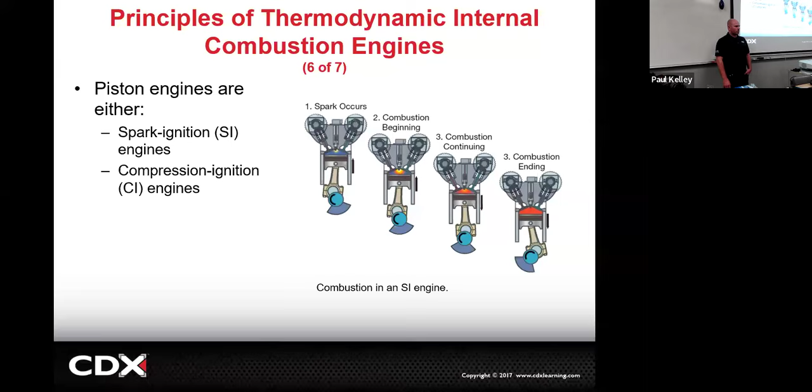Makes sense? And then the flame starts to come down, it builds pressure, and it pushes the piston down. So that's the only stroke that we really benefit from on a 4-stroke spark ignition, or really any 4-stroke engine, right? Now, yes, we have to do some of these next steps - the intake, the compression, the power, and the exhaust. We have to do these 3, but the only one we really benefit from is the power stroke.

Well, here's why, I'll explain to you. On the intake stroke, is that piston giving us any power? No. On the compression stroke, is it giving us any power? No, in fact it's taking a lot of power because we're having to push it up. So we're like, man, this sucks, we have to do a lot of work. And then a beautiful thing happens, people.

A beautiful thing - we give it a little bit of spark, and because there's already fuel in there, it initiates combustion, right? Yeah, that's on the back of some bumper stickers and some t-shirts, so we'll come back to that. It starts this combustion, and as that air and fuel are burning, it's expanding, it's building pressure. So as it builds pressure, what's it going to do to the piston? Push it down. Right there, we can harness that power and put it into the crankshaft and have the crankshaft turn a transmission, have the transmission turn the drive shaft, have the drive shaft turn the wheels.

We're getting power right there. Then, unfortunately, when the piston comes back up, that gas, that air and gasoline is now spent, so it's inert - it means you can't burn it again. We have to exhaust it. Make sense? So you do the intake, the compression, and the exhaust, all are necessary just so we can get the power. Make sense? Power is the only one that actually gives us any zoom zoom, that's where the vroom vroom come from.

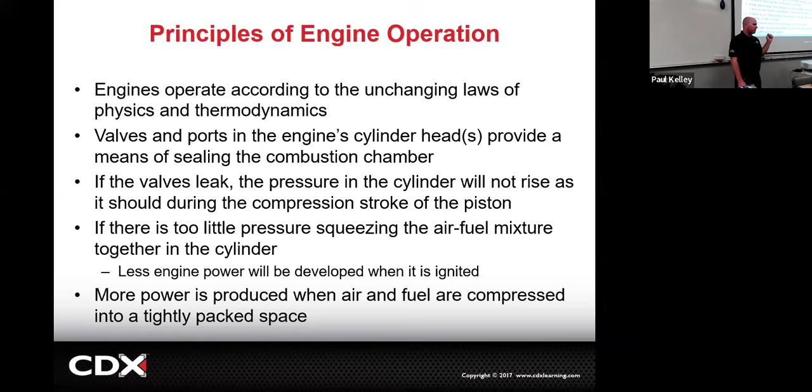All right, cool. Then, of course, if the valves leak, like it's saying, the pressure in the cylinder will not rise as it should during the compression stroke of the piston. If there's too little pressure squeezing the air fuel together in the cylinder, there's going to be either less engine power or maybe even no combustion at all. That's a full-on misfire. Make sense? So the sealing of these valves and the piston and the cylinder and all that stuff is really important when it comes to making that power stroke, especially when we're looking at how much compression it makes, okay?

So that's the main deal. And then pressure and temperature we talked about, Charles's Law: the more pressure you have, the higher temperature you have. So one of the things we need to do to start that ignition process, the combustion process, is we need to raise the temperature. How do we raise the temperature with the compression stroke?

We raise the compression, right? We squeeze it from 10 parts down to 1 part. And if we successfully squeeze it from 10 parts down to 1 part, it's hot. All those molecules are agitated and they're like, get off me, you know, and what's it going to take until it all breaks loose? It's one little spark, boom, and everything's ready.

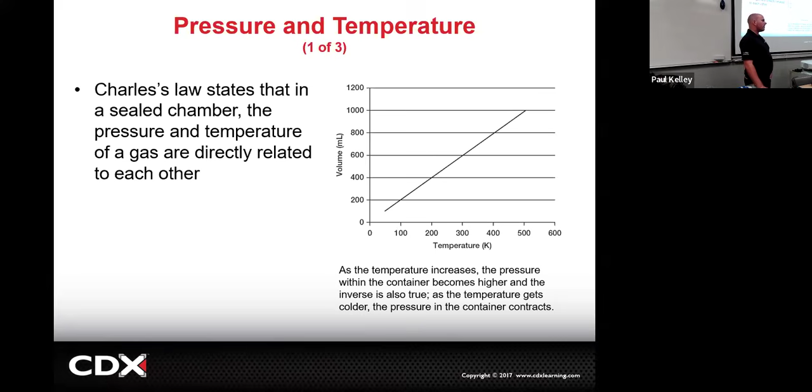But if you have no compression and you just spray a little fuel in there and give it some spark, it's not really under a lot of compression, you could spark it, but it's not going to make any combustion. Make sense? You need a lot of compression. You need the compression that it calls for in the service manual, as a matter of fact. That's why we check that.

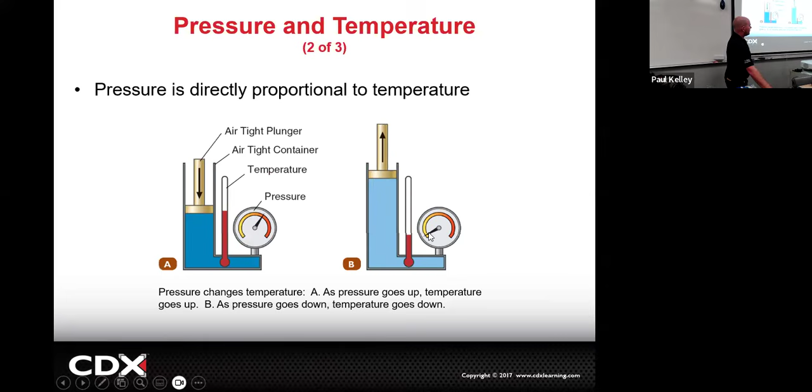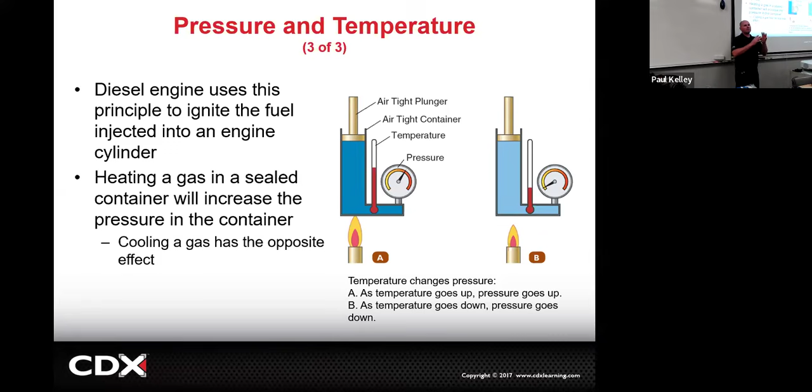Cool. And then this is just kind of illustrating the same type of thing. If we push down on this, increase the pressure, it's going to increase the temperature. If we pull up on this, it's going to decrease the pressure and decrease the temperature. If we heat it, it's going to increase the temperature and increase the pressure. And if we cool it, it's going to decrease the temperature and decrease the pressure, right? There's a lot of ways to explain the same thing. If your temperature's up, your pressure's up. If your pressure's up, your temperature's up, right? They go together. They have this relationship.

All right, so overall, that's kind of what we're trying to get at. And when we look into some more of the engineering aspects, the temperature of the gas is one measure of how much energy it has. Heating of a gas makes the particles move faster. So we're going to heat it, and that's going to make them move a little bit faster, and that's going to make them even more prone to that combustion process, like I was kind of saying.

Cool. How do we do it? We raise it first by doing compression of the air and fuel mixture, right? And the more compression we give it, this was kind of interesting: the more energy the air-fuel mixture has, the more force it exerts on the piston and the more work it can do. When we run the higher compression, everything's squeezed a lot tighter, more volatile, more ready to start that combustion process. And it's going to be more likely that we're going to have a thorough and complete combustion.

Make sense? If you're running an 8-to-1 compression, that's enough to fire the cylinder, but there might be a little bit of fuel left over. It might not really start the combustion process exactly when you were hoping, right? So by increasing that from 8-to-1 all the way to like 10-to-1, 10.5-to-1 - anybody know what a performance engine makes? What do we got on the GR Corolla? It's up there. I don't think... maybe it sounds a little high, but as you start to get over those 10-to-1s, 10.5, 11-to-1, 12-to-1 maybe, that's a very efficient and very powerful compression ratio.

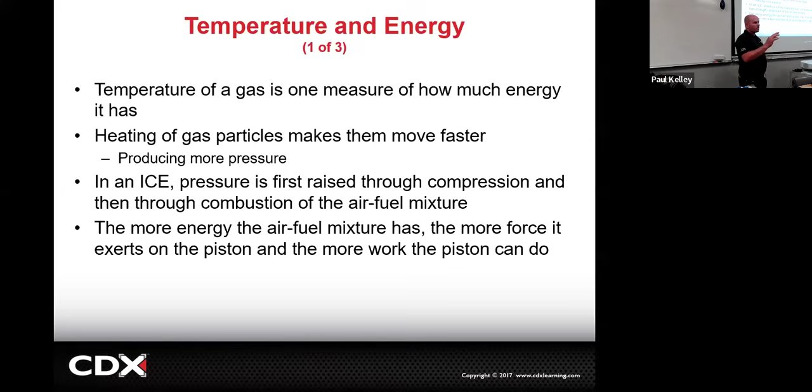Bang, spark it, and then that fuel is going to expand, and that's going to start to push back down. Cool, so that's what we're trying to do.

Now if we look at this, gasoline has a certain BTU per gallon, so there's a certain amount of power that can be extracted from gasoline. If you had everything dialed in perfect, very efficient, spraying 100 drops of fuel and 100 drops are being burned, you can get 14,000 British thermal units as a maximum from gasoline. Make sense? Who thinks diesels make more power than gas?

I mean, kind of in general. So we could say horsepower or torque, and we'll get into horsepower versus torque.

I'll help clarify it, but as fuel for fuel, look at this. Diesel has 25,000 BTUs per gallon, gasoline only has 14,000. And that's kind of the thing. So if you accept the fact that diesel has more energy in it, there's higher potential for power out of diesel. There just is. Comes with a cost though. There's a lot of challenges with that.

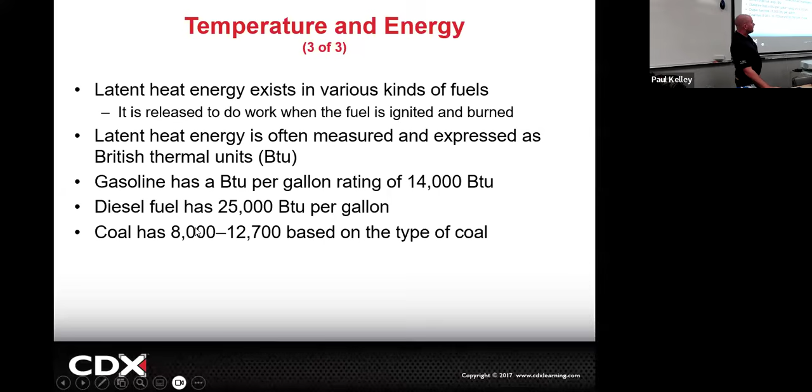And my Tesla's in the parking lot charging. I'm gonna get a green sticker, like Mother Earth, but I'm literally charging it with coal. Actually, what time is it? Solar's probably cranking right now, but when the sun starts to go down, the coal picks up. The sun goes down, the coal comes up. So right now it's charging on solar, so I could put the green sticker on there, but in a few hours I should probably take that bumper sticker off. At least most of you guys are burning gas, and I'm gonna be burning essentially coal through electricity. Just calling it how it is. I don't feel bad though.

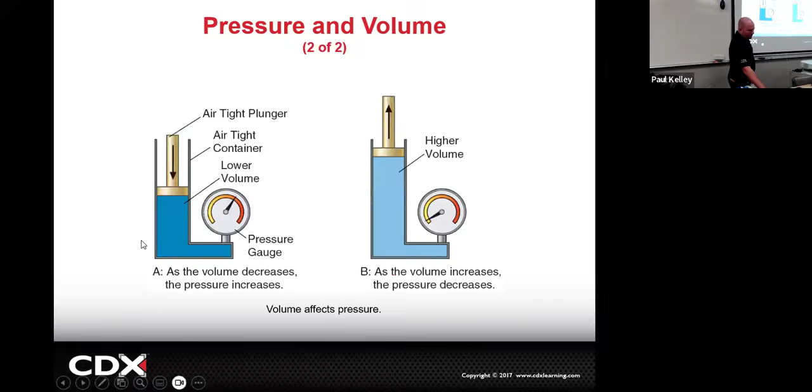All right, so I think we're probably pretty solid on that. Let me skip a couple things. Let's talk about force, work, and power.

Let's see, who's it going to be? Oh, this is definitely going to be Rudy. Rudy right here, how much is it going to take to pick this up? Well, 150 pounds. For you to move that, you have to generate 150 pounds of force. Would we agree? So that's just force, the effort to produce a push or pull action. So you're going to try, you need to generate 150 pounds to move this, right?

But the question is, how far are you going to move it? Well, in this case, 150 pounds of force is all you need. But if you need to move this weight 4 feet to get it right here, that's no longer force. Make sense? Force doesn't have a distance associated with it. That's a measure really of work, right? So it's kind of interesting.

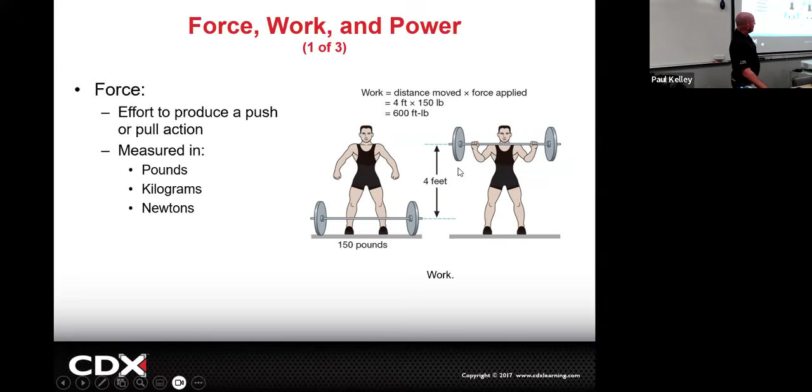If you look at the two, work is when a force causes movement, work is done. So look at it like this. That 150 pounds I'm making, that's about 150 pounds right there, maybe 200, are we kidding? All right, so did I do any work? No, I didn't move anything, right? So I generated a force, but I did no work.

A force is cool, but it doesn't really accomplish anything. That's part of the reason we don't worry too much about how much force an engine makes, because it's not necessarily usable. We need to add a distance in there.

If you look at work, when force causes movement, work is done. So technically, did I just do work? Yeah, I didn't generate a lot of force, but I moved something. I performed some work. Make sense?

Sometimes when people are moping and say, oh, I worked really hard, I look and say, yeah, but you didn't get anything done. So actually, it just means you tried hard, but you didn't do any work. Work is physically moving something, okay?

It's equal to distance moved times force applied. So if you did 150 pounds on that barbell, but you picked it up 1 foot, it'd be like distance times force, 1 foot times 150 pounds. And that would be an amount of work. Make sense? Pretty interesting.

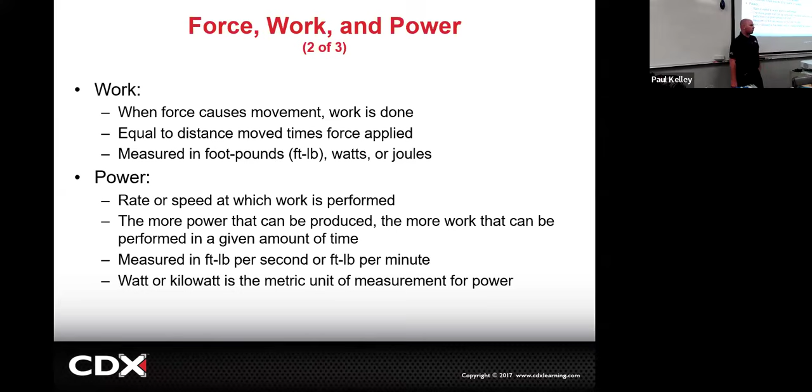Do you know what horsepower is? They figured out how much power a horse had, how much work a horse could do in a certain amount of time. So you take a horse and say, hey, how many buckets of water can you haul out of this well in 60 seconds? And the horse does 10 buckets in 60 seconds.

That's 1 horsepower. Then you got this Briggs and Stratton, and it's 5 horsepower. How many buckets of water should that be able to do in 1 minute? The horse did 10 with 1 horsepower. How many buckets should the Briggs and Stratton do? It's a 5 horse, and the horse did 10.

1 horsepower, because it was a horse, did 10 buckets. A 5 horsepower Briggs should do 5 times that amount, which is 50 buckets. And by the way, the well is 100 feet deep, in 60 seconds. So you have everything there: it moved a certain amount of weight, a certain amount of distance, in a certain amount of time.

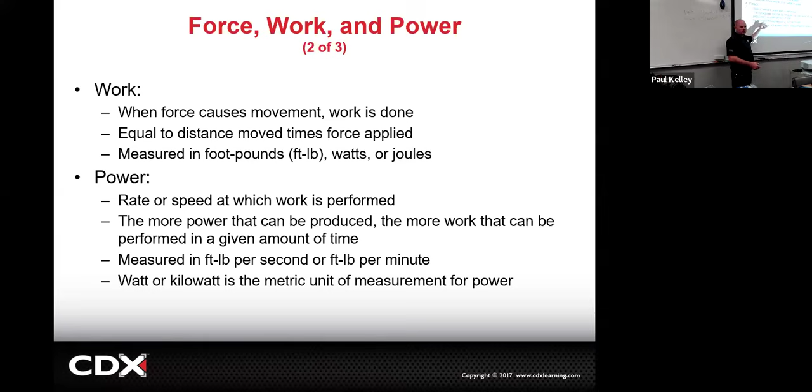That's why we use power, horsepower. Make sense? No, you hate it. Fine, we're moving on. We're definitely moving on.

Cool. So breaking it down, torque is twisting force; movement doesn't have to occur. It's applied before or during movement, so that's where it gets a little weird. If you go to tighten a lug nut and your torque wrench clicks at 100, you did apply force, you just didn't necessarily have movement. It's still kind of like torque, you just didn't really do any work.

So there's your torque. Rotational force applied to the crankshaft of an engine is called torque. Unit of measurement: foot-pounds. Now the formula for horsepower, this is where it gets weird. Horsepower equals RPMs times torque, divided by 5,252. I don't totally know who came up with that number, but that's how we convert it into what a horse could do.

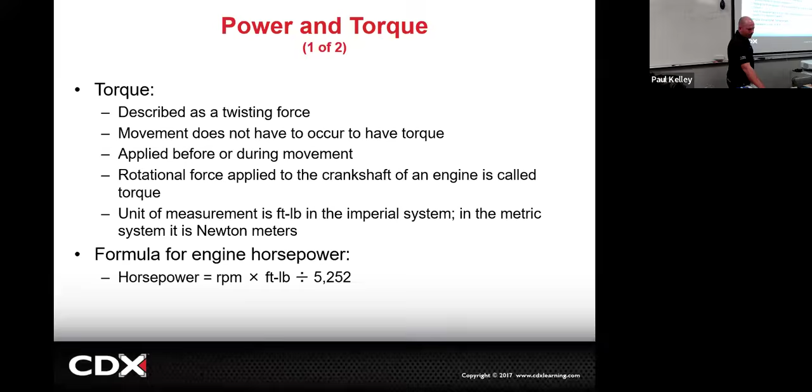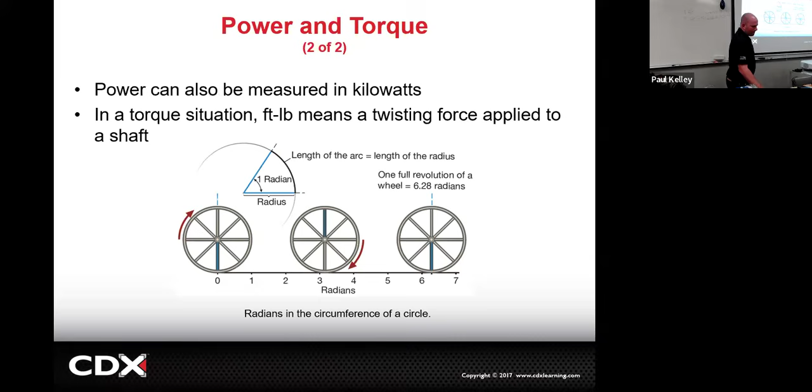So a lot of times horsepower is calculated. You can of course measure it on a dyno. A lot of times dynos have their own electromagnetic way to load the engine, or sometimes use water, and we measure how much work it does in a certain amount of time. That's how we measure horsepower. Or you can measure it in kilowatts, which is more normal for electric motors. In fact, sometimes they do measure electric motors in horsepower, they'll say that's a 3 horsepower electric motor, that's a big electric motor. But most of the time they're going to measure it in kilowatts. All right, so overall, I think you get it.

Now, when we start talking about the load factor or the power range, this comes into how the engine is designed, how it's made to work. If you want an engine that can run all day, every day, at 50% of its redline and just do work for 8 hours, honestly, a typical gasoline engine is not going to be real happy with that.

They'd usually go over to a diesel and build a diesel to be able to do that. So if you went on a construction site, you see somebody moving dirt all day. They work 8 hours a day, that's their whole shift. They just move dirt all day. They're going to design an engine to be able to do that all day long, every single day. Make sense? You think that's what our cars are designed to do?

Your average car, you think somebody jumps in there and just moves dirt with their car? What do you think they're doing with their car? They move their butt from their house, from their couch, to their job a half an hour away. And then it sits in the parking lot. Then they get in, they do it again. And guess what they're going to do tomorrow? They do it again, right? So our cars are designed mostly for that.

If you wanted something that was going to move dirt for 8 hours a day, plus sometimes these things are multiple shifts. Like locomotives, for example, when I worked on those, a locomotive would get started, sit there and idle, we'd do the checks. It would run from here to Texas, sometime 24 to 36 hours from now.

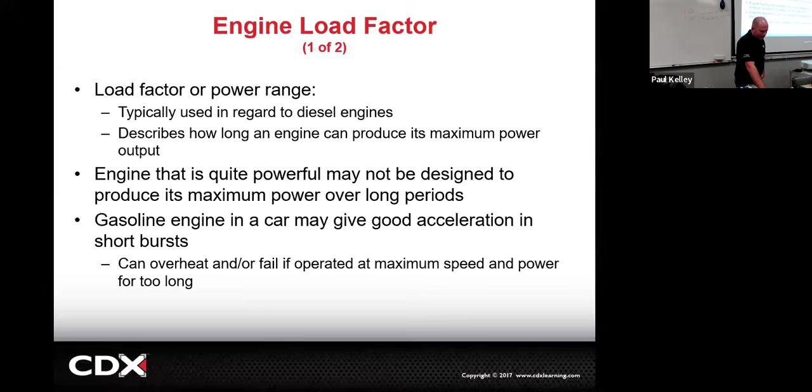In a way, yeah, it's what it's designed for. The longer and harder you run something, heat just builds up, and the more heat builds up, you start to have some parts get hotter than other parts, and now you have things that are not shaped exactly how they were supposed to be shaped. So you got to manage all that heat, it's much harder to do. Diesels, though, are better at that.

If you want something that's going to idle for a long time, be honest with you, a lot of police cars would do better as diesels. Because they're just leaving them running a lot. They got to be hot, ready to do a high-speed chase. Diesels would probably be better for them, in my opinion. Go ahead.

Yeah, that's what they're made for. Typically when you look at a newer modern car, it has a big electric cooling fan, so we're not relying on higher RPM. You've got a lot of various sensors that are looking at the parts. Any modern car is made for road trips too. It's just not really made for stop and go traffic, like a taxi cab. A taxi cab is going to be hard use for an engine, pretty hard use. But for a road trip, it could easily handle that.

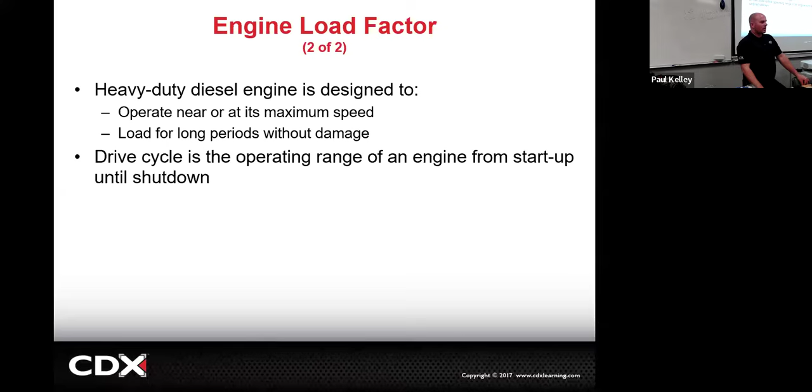However, I wouldn't say they're designed to do a road trip, then leave it idling, then drive all the way back and be idling 16 plus hours a day, every day. It's probably not going to hold up all that well. But at highway speeds, it's a little easier on them. The stop and go is what's tough, for sure.

All right, pretty good. So then we get into, remember, horsepower is twisting force. Torque is twisting force, horsepower is the rate. So there's your dyno. Then when we get into the factors that affect an engine's torque output, it has to do with volumetric efficiency. That's a big term you guys are going to see.

Volumetric efficiency, picture it like this. When we talked about that intake stroke, the intake valve opens, the piston comes down, it pulls the air in, but the valve has to close kind of quick because the compression stroke is coming up. So you get a certain amount of time: intake valve opens, pulls it down, intake valve has to close. Was that enough time to thoroughly fill the cylinder? If you could completely fill the cylinder with air, that would be 100% volumetric efficiency.

Try doing that at 8,000 RPMs. At 8,000 RPMs, that valve is open for such a short period of time, you're probably not getting all the air molecules all the way down into that cylinder to 100%. Does that make sense? So your torque is actually going to fall off. You're going to make your most torque when you're having really good volumetric efficiency. When you get close to redline, high RPM, your torque number a lot of times will fall off, even though your horsepower number might keep going up because you're still doing more RPM, more revolutions per minute. Kind of interesting.

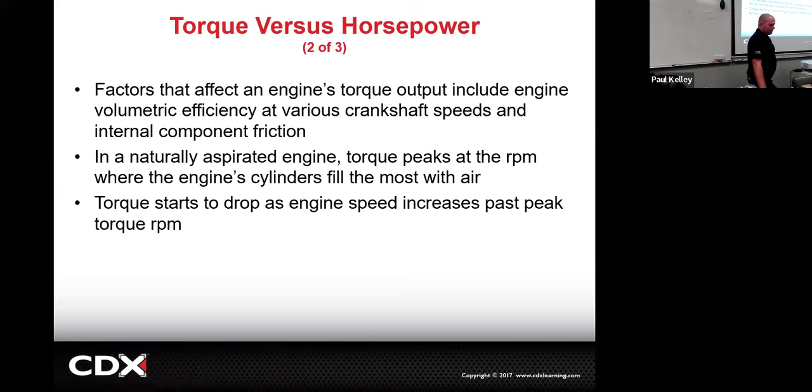Well, for one thing, it's kind of hard to have all the airflow in when there's a little bit of exhaust gases left over in the cylinder. So this is a good way to get those exhaust gases flowing a little faster. Or let's just say, do you guys remember what actually causes the pistons—the valves—to open and close?

So here we got a cam lobe right here. What if you were to open up the valve further and that allowed a bigger opening? Do you think more air could come in? Oh yeah, so maybe we should put a bigger, fatter cam lobe on there, a high lift performance cam lobe, like that, a little chop, right? So sometimes changing the camshaft can improve your volumetric efficiency.

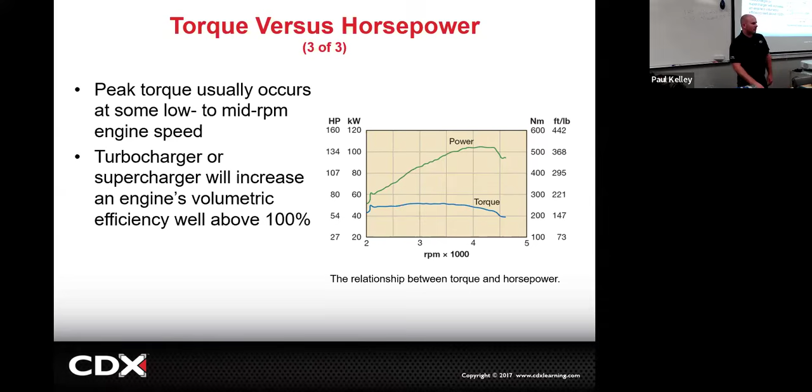And then Toyota's going to use VVTi, and everybody's using their own version, BMW uses Vanos, you know, they got to be special. Nissan's going to use VVEL or something. They all have different names, different technologies.

Generally, horsepower and oil are unrelated. So despite the forums, everybody wants to use the one with the shiniest bottle and stuff. You're not gaining horsepower. If you're honestly gaining horsepower because you changed your oil to a different one, there was something severely wrong with the first oil if it was adding that much friction. Oil should help the lubrication, help the heat, help minimize any wear, but free up horsepower? Nah, I don't think so. Unless it was sludge going through there, which is scary, and I have seen it.

Now let's break down a little bit of those other terms. TDC and BDC. Everybody got TDC? Top dead center, that's as high as it goes. Top dead center is the highest point of that piston. So a lot of times when you go to time stuff, you might need to set top dead center. How would you find top dead center?

Sometimes there's marks on the timing components. For example, I've got a little sprocket here, there's a little dot on that. You guys can see that dot? How about the light, look at that little dot. Oh yeah, right there, I got it on bottom. How about if I went to top? You can see it's right about at the top now. So there's timing marks, yes.

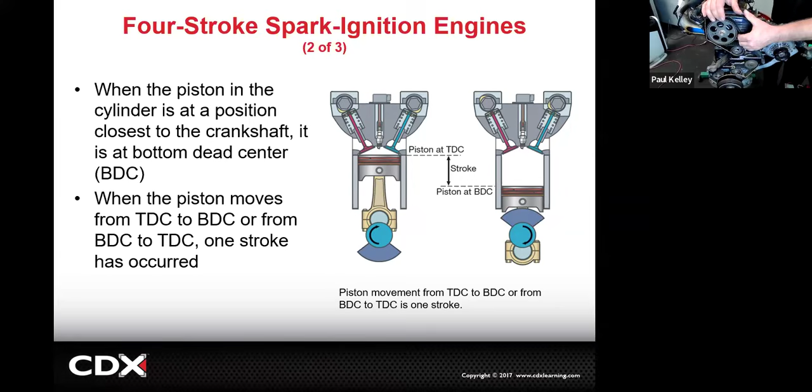Once in a great while, if the timing belt's really worn and the tensioner's really sloppy, you'll go to back it up and sometimes it can jump a tooth. This actually happened to me once, but I was working on all kinds of stuff. Most people will never experience it. However, when it happens to you once, you're like, don't ever turn it backwards, it'll jump it. I turn them backwards all the time, but this one I had was doing that. It actually had a problem with the tensioner, the tensioner was flat and it was enough to keep it kind of tight and forward. But when you went to back it up, all of a sudden one of these teeth jumped the cam, and I ended up a tooth off because I turned it backwards. We're good, but normally that's not going to be what we see. That'd be very exceptional.

What's BDC then? From bottom dead center to top dead center, there's a measurement right there, and you know what it is? It's called your stroke. So if I were to go piston, bottom dead center, make a mark, and then go all the way to top dead center, make a mark, that distance right there is called your stroke. If it's 3.5 inches, that would be like a small block Chevy.

Sometimes what they'll do is, I'm gonna take my small block Chevy and do a stroker kit, go from a 350 to a 383, and they'll take the stroke from 3.5 to like a 4-inch stroke. How they do that is they have a bigger offset on the crankshaft journal, and then they use a shorter rod, so you can vary the stroke. If you think about this, the further your stroke goes down, it's still got to go back up to TDC, right up to the edge of the head. But if you pull this down further, why is that a benefit?

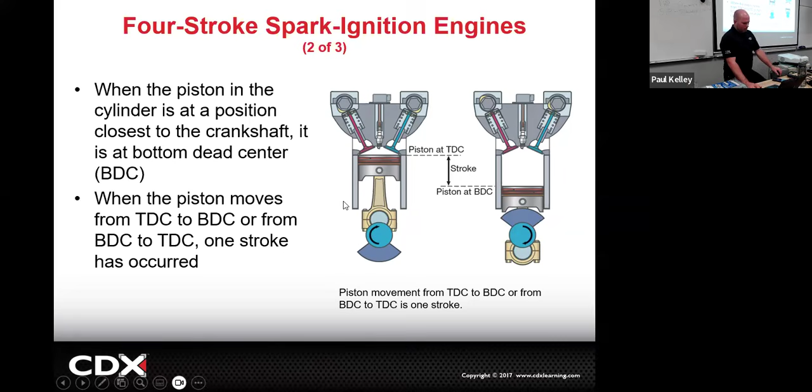So oil consumption, similar to this, but it has more to do with bottom end, which I promise we will definitely cover. All right, cool. So you guys are good with TDC and BDC? All right, very nice.

All right, how about if we had two strokes? I think I'll just give you a brief preview of a two-stroke. Remember how we talked about the 4-stroke cycle? Intake, then what? Compression, then what? Power. Combustion or power, interchangeable, good. And then exhaust. A two-stroke's kind of weird.

I'll give you just a few words on it, but then mostly what I want you to do is watch the video I have in the discussion. A two-stroke is going to be like TDC. It's going to come down, and it's got ports that are going to be exposed, and it's going to pull intake air and fuel into a port. So it doesn't have valves. It's got actually a cutout.

It's going to pull some in. It's going to go down to complete its intake stroke. And when it comes up, it's going to be kind of like exhausting the other stuff that was still in there, right? So it's kind of weird. It pulled in some new air and fuel, but as it goes up, it also kind of pushes out the little bit of air and fuel from the last stroke that's left over. Then it comes up and it's actually going to compress, then spark, which is going to ignite, combust, and a power stroke's going to come down.

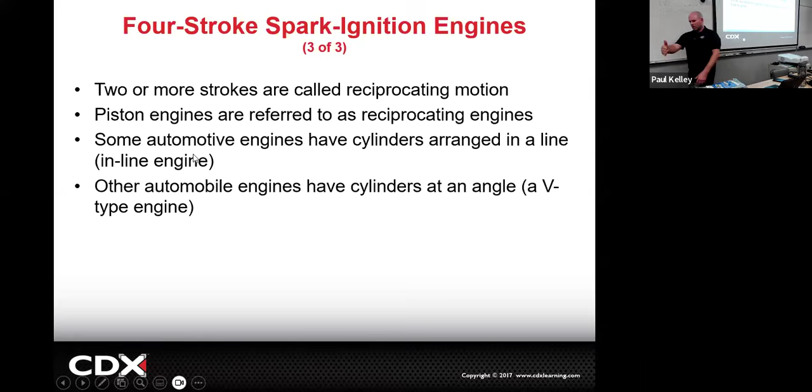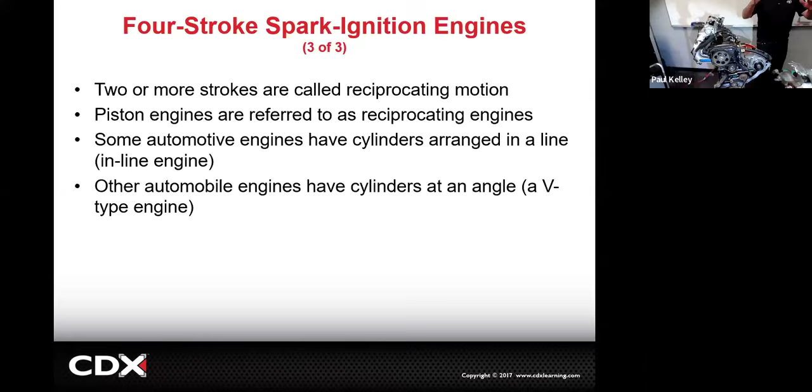We may have inlines, you guys know about those? Inline 4, don't even need to move it. Inline 4 right there. If you got an engine that's on a V like this, oh, you do? Might need to move it a little. Inline 4 right here. Whoa, nice, man, because we got 4 cylinders right in a line. What if you've got an engine like this? All right, good. So you know enough where we can proceed. We're going to see a little bit more.

Now let's take a look at the primary components. So this is where we get into the bolt-on parts of the engine. If you look at this, we have got, let's start with the intake because that's where the air starts. Then let's bring it over here. We're going to get a good look at this. We're going to leave it over here. We're going to be back and forth on this a bit.

All right, if you guys look on this engine right here, you see this metal intake. Let's take a look at this. Intake, exhaust. We'll do intake, head, exhaust, block.

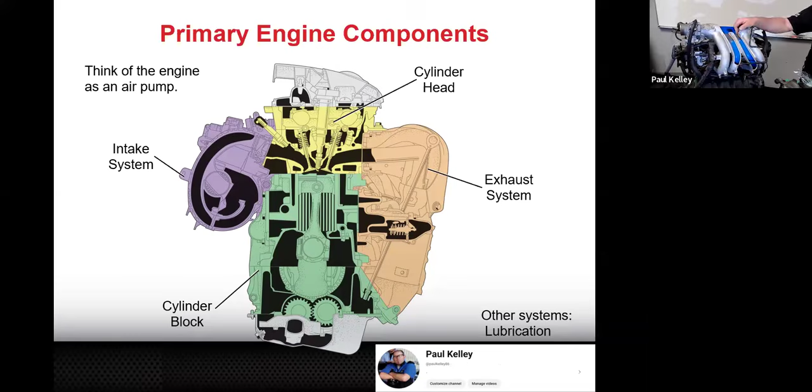That should have been on. You guys are on the Zoom. Is that off? You were seeing the main screen before, right? Abner, what you got? Okay, but it wasn't like that before. It was. Good, don't click it, just leave it normal so I can see what it's showing. So right now we should not be doing the screen share. Okay, that's what you guys should all be seeing. Let me pull it over to here.

Okay, you guys can see this big old intake right here. What do you want to call that part? So this is the whole intake manifold.

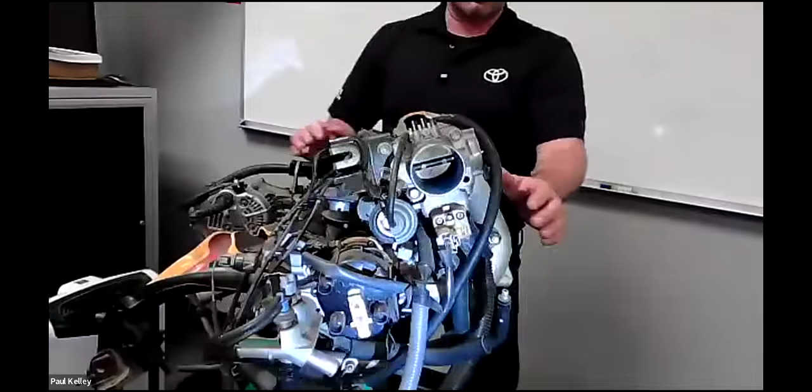Some other parts would be right here, you can see this. Burp, burp, burp, burp. Yeah, so there's our throttle body. This is all part of the induction system. So if you guys can see, air is going to come in here through the throttle body.

And then it's going to go from, and you know where it comes from before that, right? The air box and the air filter, which is going to have the mass airflow. It's going to go into this manifold, and can you tell it's going to split it 4 different directions? All right, so if it splits it 4 ways, that's why it's a manifold. Comes in as 1, splits it to 4.

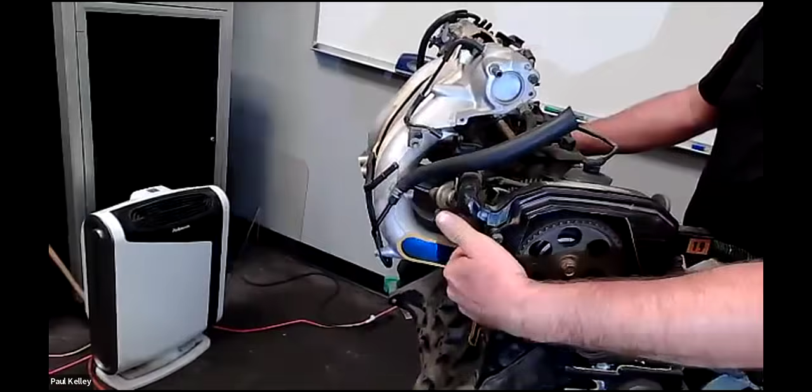Then if you can kind of see, the intake is bolted onto the head, and that's why I get to spin this all around. You see that the intake ports are going to go to the head. Then you can even see a little bit in that cylinder. All right, so right there, anything from my hand up is the head.

Anything from my hand down, you can see this is the head gasket in here. Well, you could kind of see it. Down is the block, we call that the bottom end. We call this the top end.

Cool, so the air is going to come in, it's going to go into the cylinder head. So there's a valve in there, which you might maybe kind of be able to see somewhat. But the good news is for you, I brought one anyway.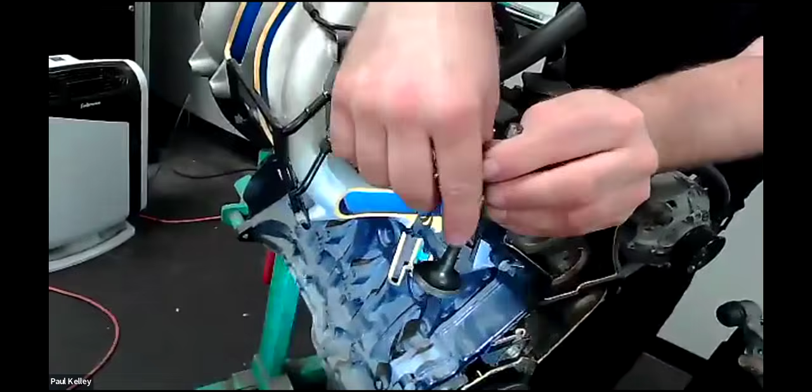All right, so here's an example of a valve. It's going to go up to this intake valve, and it's going to wait. Now, what's going to make this intake valve open? All right, look over here.

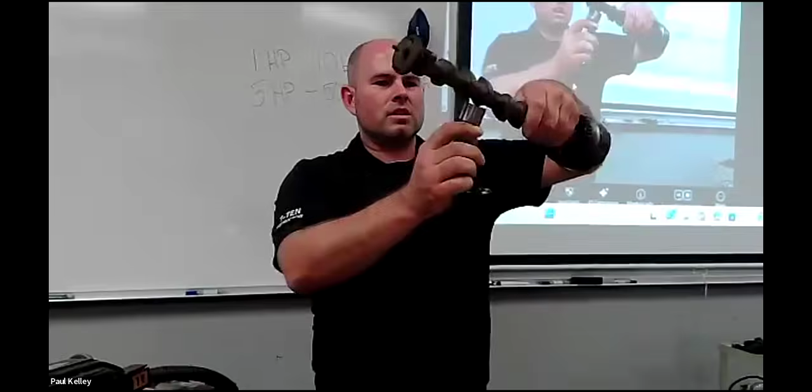Depends on the design, but let's just say this valve has a bucket on it. That's a bucket. And then that bucket is going to be driven by the cam, okay? Makes sense? So right now, that's closed. As I rotate this cam, we'll notice there's a point. Can you guys see the point? As the point rotates to it, what's it going to do? Push it down, and then it's going to bring it back up, right? So there's the action of the valve.

Now that was a bucket design. Those are basic. We'll also a lot of times use a lifter. The cool thing about a lifter is the roller will roll on the cam. Now this one's from a small block Chevy. So that's a cam in block.

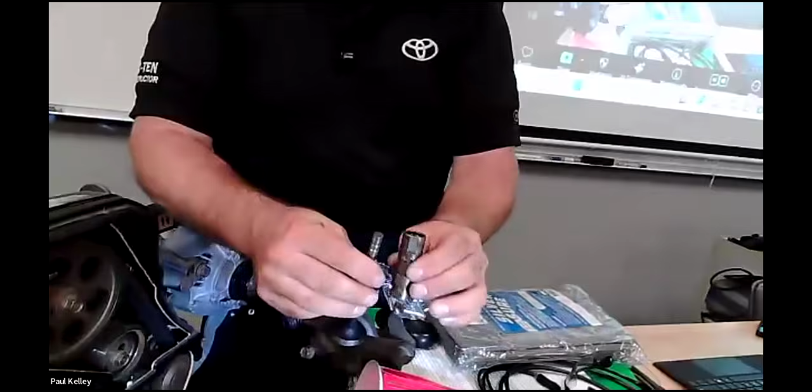So the cam is in the block. The lifter follows the cam. It's going to push up on a push rod, which is going to push down on a rocker, and that's going to open and close the valve, right? But if you just understand, this is going to roll on the cam.

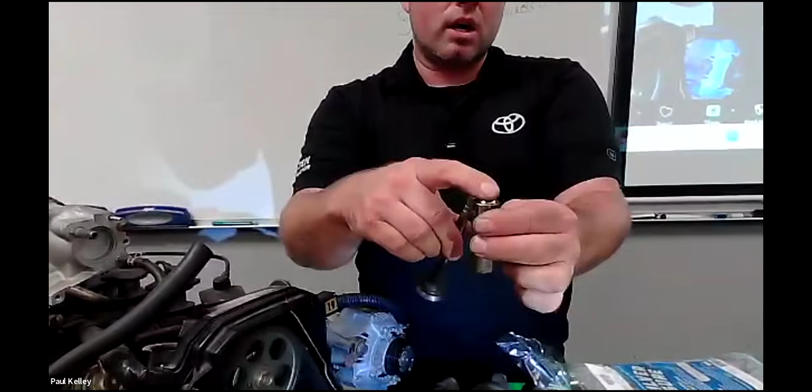I'll fib to you and I'll say it goes this way, but it doesn't because it's not from an overhead cam. But this would roll on the cam, and then it would push the valve down. But you know what the positive of this is? This is a hydraulic lifter, a hydraulic lash adjuster.

You don't have to adjust it. It gets pumped up with oil and it keeps it tight, but it makes up for a little bit of wear. The thing is, if we have the bucket style, this bucket right here, this is good. It's more simple, but as the valve wears into the head, we need to shim this. You guys ever heard of adjusting the valves or shimming the valves?

That's where it gets a little tricky. So like this one, this is number 43. You'd actually have to take this bucket out and put in a 42 or a 41, depending on your measurement. And so these require a lot more maintenance. And now that's the intake.

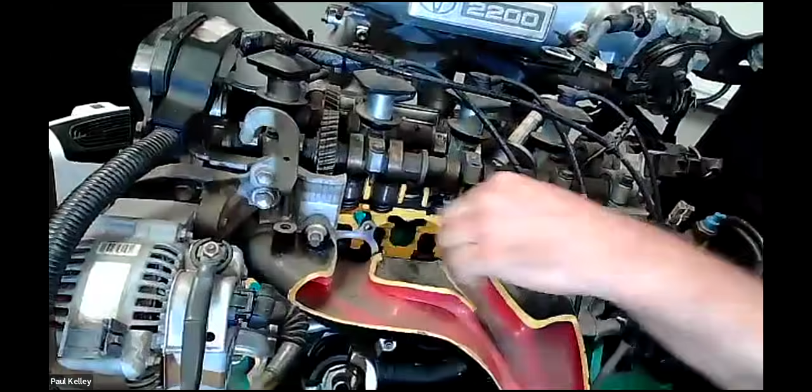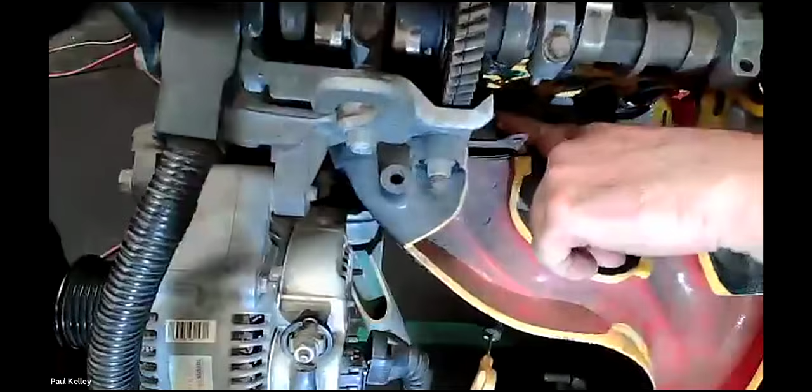And then we got into the cylinder head just a bit. From this side, you can see it better. All right, what can you see right there? The air is going to come in through that intake valve, go in the combustion chamber, which I can actually turn this, get you a better view. Ooh, that's hard to turn though. All right, you can see in the combustion chamber right there, you can see these two exhaust valves.

So the air will go in the combustion chamber on the intake stroke when the cam pushes the intake valves open. And then it's going to do compression, which both valves will be closed. And then when both valves are closed, the piston comes up to TDC. And what's actually going to happen at that point? Do you remember? Spark, right?

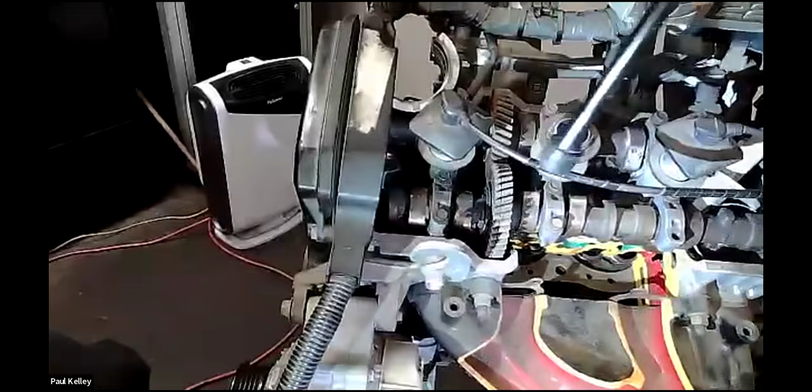So if I look right here, see this? Here's the spark plug wire. The spark plug's down in the hole, and the spark plug actually comes through. It's just a little out of sight, right? So the spark plug's into the actual combustion chamber.

Yeah, I don't think anybody can quite see yet, but it's okay. We'll see pictures too. So when the spark ignites the air and fuel, it's going to push the piston down, right? So that piston's going to start to go down. I have turned this engine, but it's pretty hard to turn.

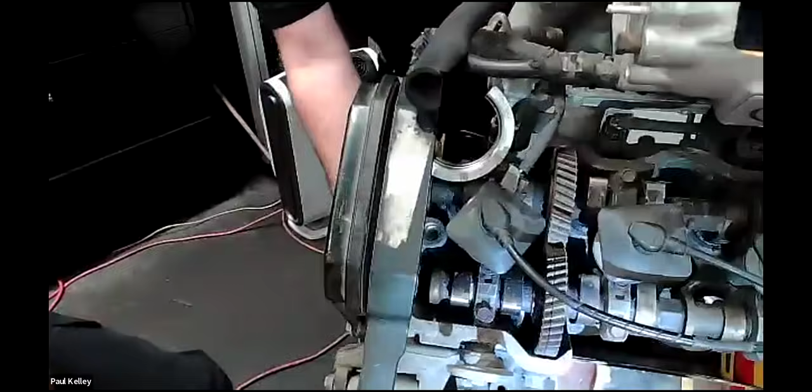I may be able to. Yeah, there we go, there we go. Oh, all right. Put a hand on that alternator there, Shani. All right, here we go. Come on, get that lighting right. I think you got to get the light closer. You got to get above that. Yeah.

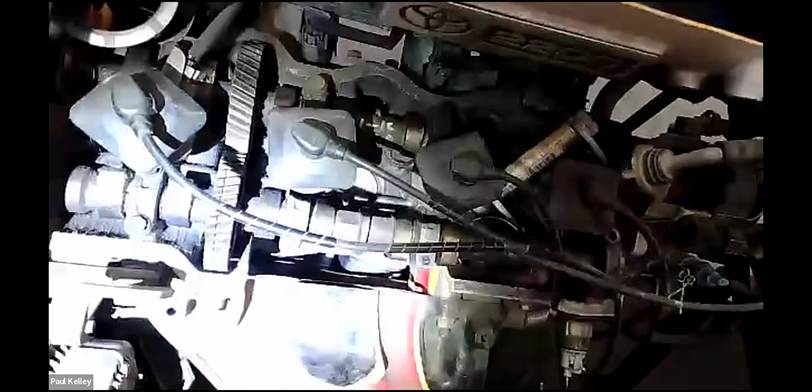With the light, you can see - it's so hard to turn, but you guys can see a little bit of the movement. The piston's coming back up now.

Oof, all right, let me try. What if I'm in? Yeah, click, click. Actually, maybe no light. I've also got it turned too much now. How about in there? David, you're hired. You might be able to see something. I'll try to turn it. Oof. It's tough to turn though.

Yeah, oh, you can see it. Yeah, you can see it. All right, here we go. Here we go. You can kind of see it. There, so you saw us get pretty close right there. All right, it's too exhausting to do, so I'm going to roll it up a little.

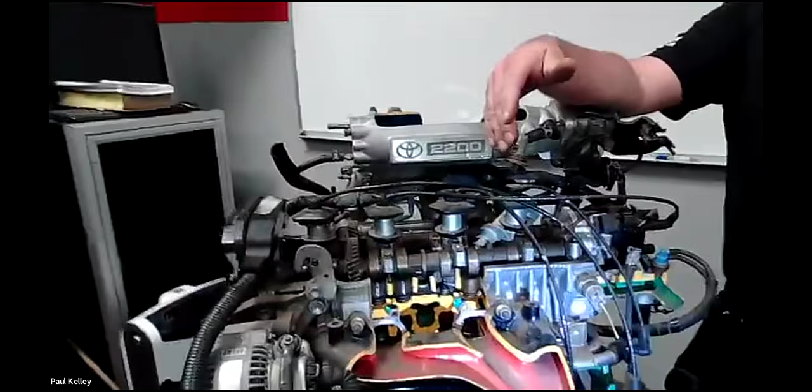So you guys saw when we got to TDC, that's when we'd fire the spark plug, right? That would give us the power stroke. When it gets to BDC, what needs to happen?

We need to exhaust it. So you know what we need to do? This exhaust camshaft needs to open that exhaust valve, right? So we got the exhaust valve closed. The exhaust camshaft lobe should be timed in such a way that it'll start the push down of the exhaust valve at the right moment. And then if I were to rotate again, which is pretty hard to do, you'd actually see the piston coming up and the exhaust valve is open. And that exhaust is going to port into the exhaust manifold and out.

And ultimately, where's this going to go? Out to the tailpipe, yeah.

What cat? Oh, straight pipe mod. Okay, no meow. All right, cool.

And then I think you guys can take a look at the timing components real quick here.

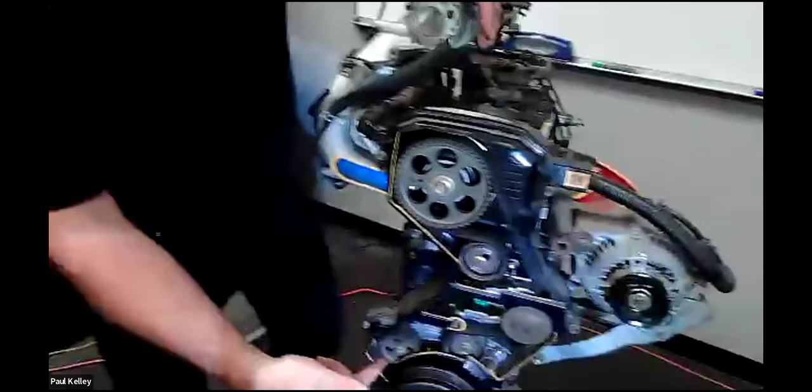Here's your crankshaft - this is what I was turning, and you can see it's pretty hard to turn right there. The crankshaft will turn the belt, and the belt will turn the water pump, and this is the tensioner, and ultimately it'll turn this camshaft, which goes to another camshaft. So this has dual cams but only one sprocket - this is the cam that drives both cams. As I turn this, you'll notice it's turning the sprockets, and everything has to be in time.

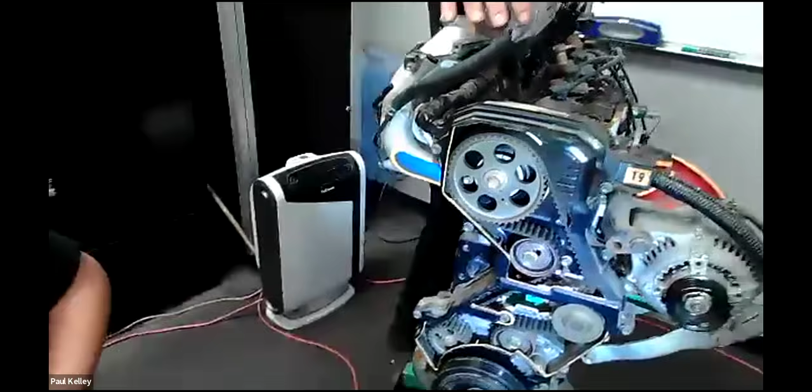If I were to make a boy band about being in time, what would I call myself? Oh, in sync - everything needs to be in sync.

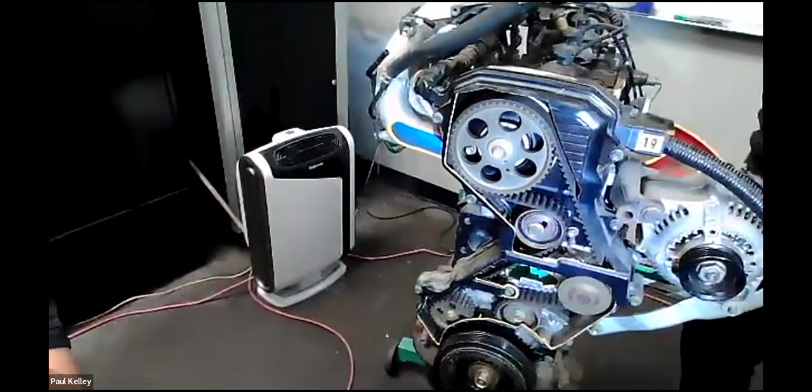When it's top dead center and we start coming down, I need to open the intake valve - the camshaft needs to do that. So this camshaft needs to be timed to the crankshaft through the timing belt. Then I get to bottom dead center, and both valves should be closed because it's in sync - they need to be in time.

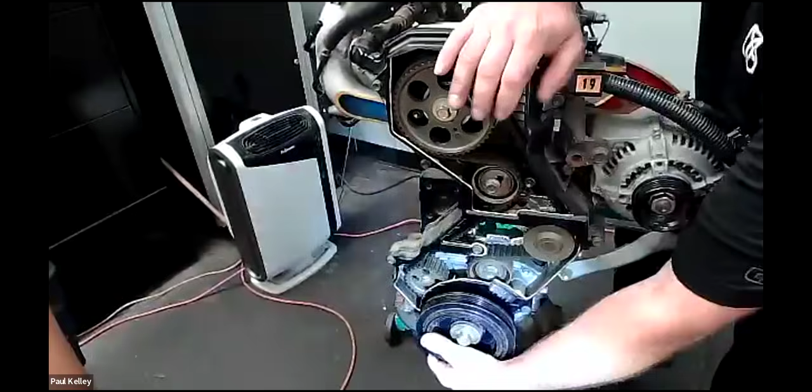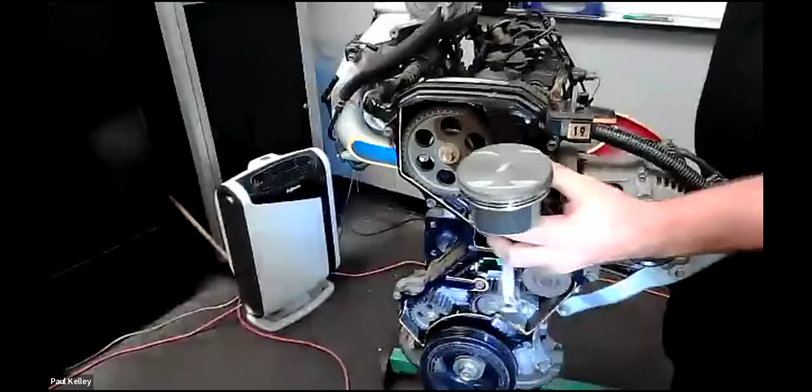If you think about it, it's kind of crazy, but as I'm turning this crankshaft, the camshaft only turns half the speed. So if the crankshaft turns a half an RPM, 180 degrees, the piston goes from TDC to BDC - holding the piston and valve right here. If it was on intake, I'll open the intake and go to BDC, then close the intake, compress it, fire the spark plug, and then on the way back up, open the exhaust valve.

We had to go 4 strokes - that's 180, 360, 540, 720. So 720 is 2 full rotations - 360 times 2 is 720. The crankshaft has to turn 2 times to do the 4 strokes.

How many times did the intake valve open? Only one time. So we need the crankshaft to turn twice and the cam to turn once, so it'll open the intake valve once, and the exhaust cam turns once, opening the exhaust valve once. So if you had a 10-tooth crankshaft timing belt sprocket, you'd need a 20-tooth timing belt sprocket on the cam to make it turn at half the speed. A little trippy if you think about it.

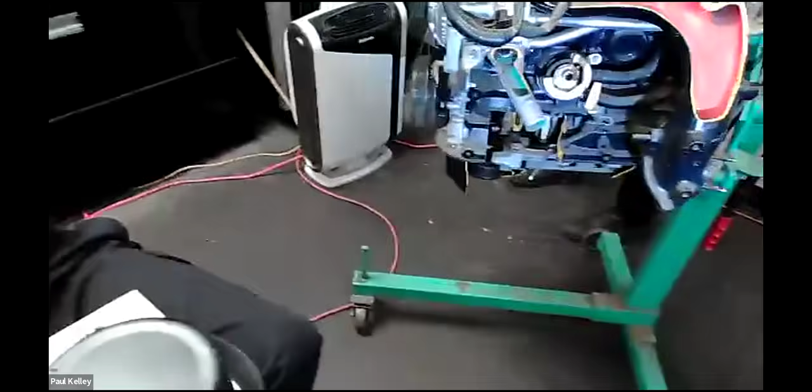So the crankshaft turns twice as fast as the camshaft, right? With all that, I'll whip it around here, and you can see just a bit of the crankshaft. Pretty nice to see.

Down here is what's considered the crankcase - that's more like the oil pan. The crankcase is in here. The oil is going to be down here, but right here is going to be like airspace. If you overfill, the oil will get into the crankshaft and get foamed up - that's why we can't overfill the oil.

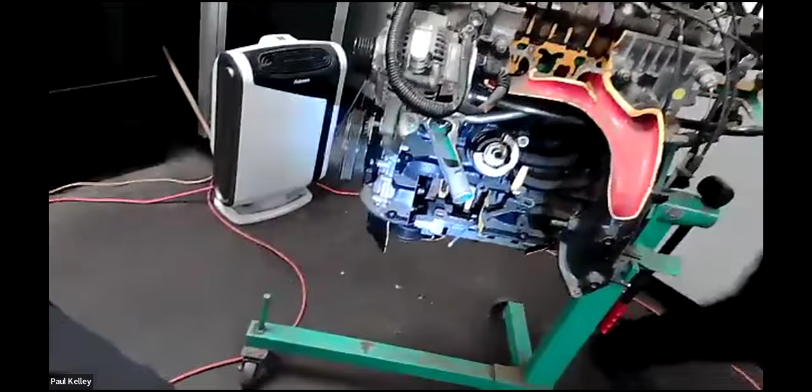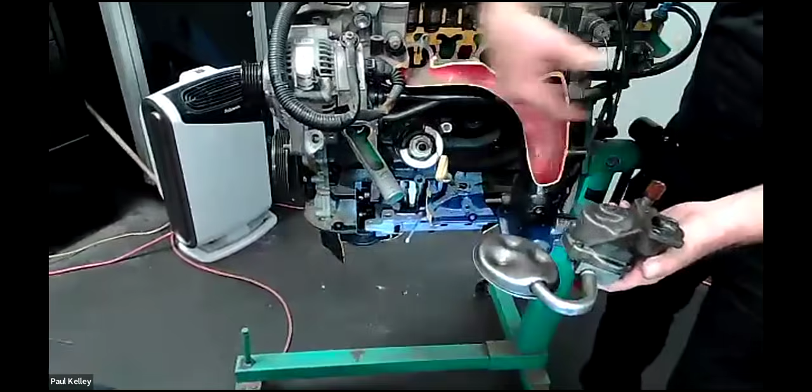If you underfill it, we've got a big problem. If you pull the dipstick and there's nothing on it, you run a major problem. This oil pump, which is from a small block Chevy, dips down into the pan - but what if your oil's so low it's sucking up air? You're not going to put pressurized oil all through the engine, and you're going to have a lot of friction. You're going to burn some stuff up - it's going to get messed up fast. So this is your oil pump pickup.

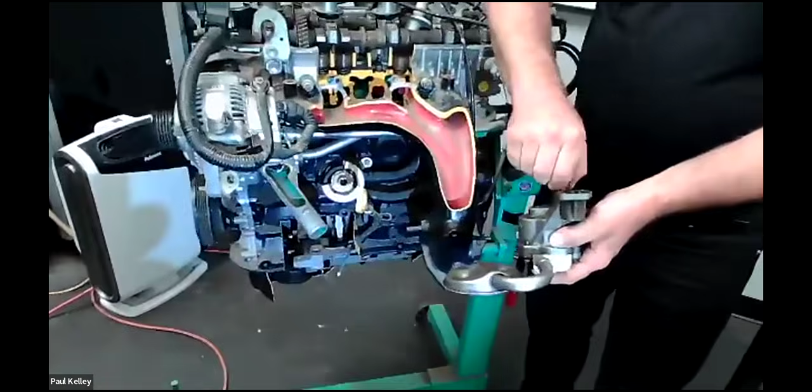Your oil pump is driven by something on the engine - maybe driven by the crankshaft directly, sometimes driven by the camshaft, but the oil pump is not belt driven. Now there's one exception - on a couple of the new diesels, they're making a timing belt driven oil pump, which is freaking nuts and stupid. You can tell them I said so, but generally this is driven by the engine. So you don't get oil pressure till you start the car.

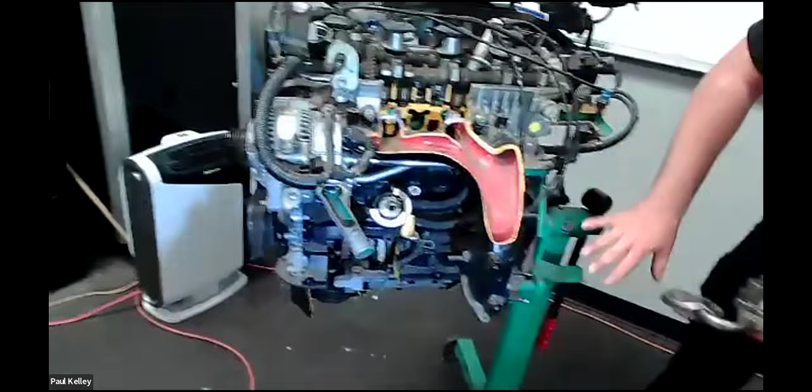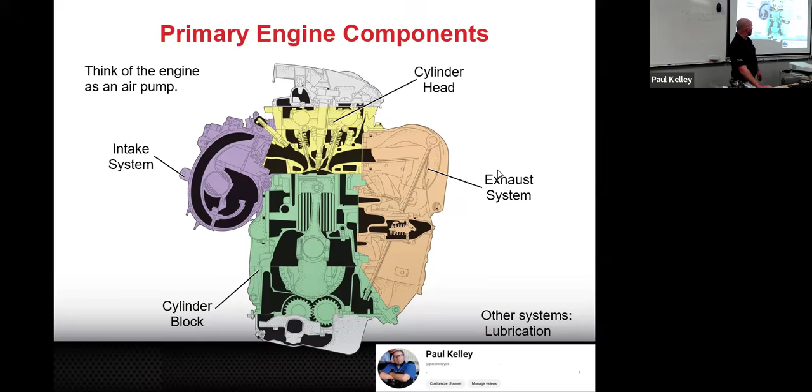You explain that short block? Yes, but I have it later in the presentation. But absolutely, and we'll keep an eye on the time. I think we got a little bit more we can do. You guys heard it and you want to keep rolling? All right, we'll go at least a little more before we stop.

If you don't know anything about this, I'm going to help you. If the injector's in the intake port, what design fuel injection would you suspect this could be? Port fuel injection, because the injector is in the intake port. That's port fuel injection. You guys have heard of direct injection? Direct fuel injection, where's that in?

Well, all the manufacturers are doing it, but like where this spark plug tube goes through and the spark plug's in there, you'll actually have an injector here, or in Toyota's case, they bring an injector kind of down on the bottom. That fuel rail's way down here, and those go directly into the cylinder.

Okay, so two differences, the positives of each. The port fuel injection, it's easy to get to, it's easy to service. It's been tried and true for like 30 years or more. And generally they're fairly efficient, and that fuel cleans the back of this valve. The direct injection is a little bit better because we don't have any leftover fuel right here, because we're spraying the fuel directly into the cylinder.

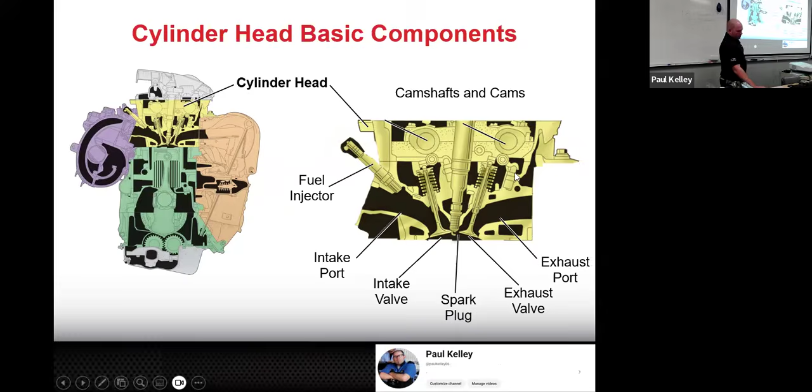So they could vary. Then if we get into the block part, we've got the whole cylinder. The upper part will be the combustion chamber. We've got a piston pin or a wrist pin, and that connects it to the connecting rod. So there are all those pieces, pretty easy to see. On top of the piston, or installed on the piston, there are some rings - compression and oil rings. Sometimes they'll say number 1 compression, number 2 compression, oil control. They might have slightly different terminology, but you've got some rings on there.

It would go around, and that's kind of like blowby, right? And if the compression goes around, then when we're on intake, guess what's going to happen? And when we're on power, guess what's going to happen? The combustion chamber, which has little droplets of oil, is also going to go around as blowby. And what's it going to leave on the liner, on the cylinder? Probably oil, yeah. Oil is going to be on there.

So you're going to have oil consumption. You're going to have low compression. You're going to have oil consumption. And what do you think the fix is? Maybe rings, if it's truly the rings. You know, like me and the mad scientist got to tear apart the block to replace the piston rings you fried. Like, we could do that.

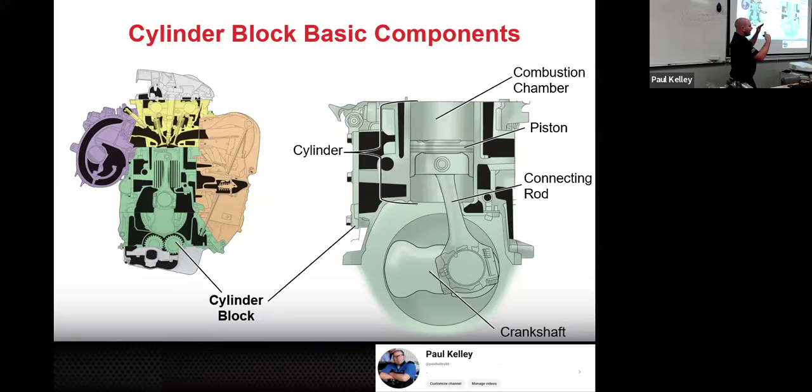All right, so that's a bit of your bottom end, and we covered the bottom end. So you guys know the top end and head is a whole lecture, and the bottom end and block is a whole separate lecture. This is just the overview of how they fit together. Now, I told you we were going to cover this in more detail. It's kind of review, but this is where we're really going to dial it in.

You ready? The intake. Tell me what's happening there. Air entering. All right, what's the piston doing? Piston's going down, intake valve should be open. It hits BDC, what happens?

Intake valve closes, so no valves are open, right? That makes sense because this is on its way up. If you want to build compression, you can't have a valve open. Compression gets to TDC. What happens?

Spark, right? That's going to start to combust, burn the air and fuel. Now the fuel was already in there if it's port fuel injected. If it's direct injected, sometimes they don't spray the fuel till the last second. They do all sorts of crazy stuff with direct injection fuel systems. But either way, it's air and fuel. We spark it, it starts to build pressure, pushes down. That's the power stroke. Then BDC, it does what?

Comes, exhaust valve opens, and this comes up, and it's going to push all the air out. That's exactly it. But one of the things I like to point out is, if you were to look at the crankshaft, it's actually at top dead center twice.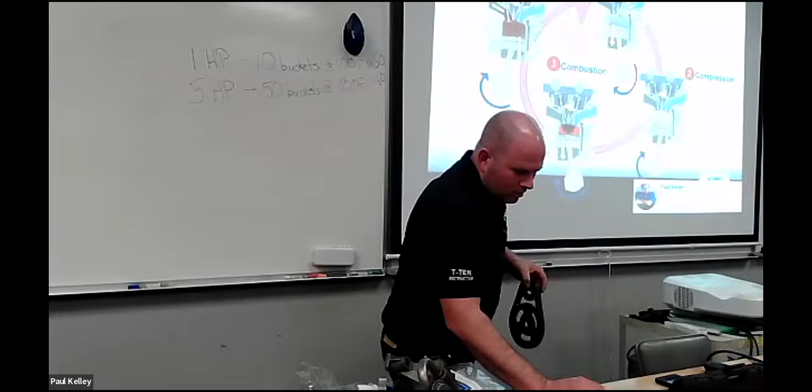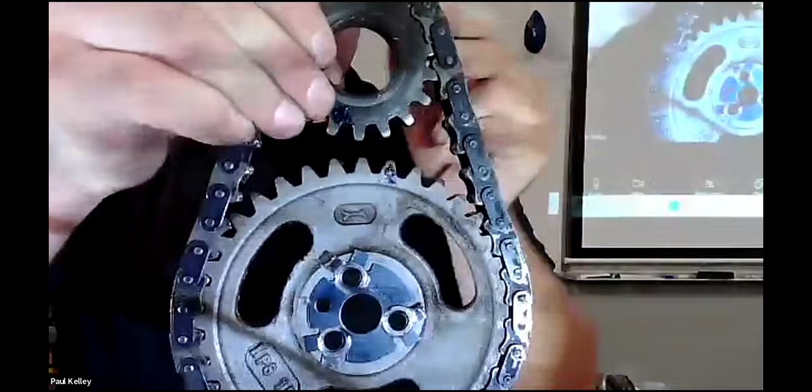Okay, this should immediately show you the camera. Okay, now when I bring it over here, all right, technically, let's see it with—is the light helping or making it worse? Let's see. All right, maybe we need just a little more light in my face so I can't see.

Can you guys see those timing marks are lined up? That's generally going to be your TDC compression. Now watch when I turn this. This is upside down—this is actually the crank and this is the cam. But I think it's going to be easier because this cam's kind of heavy to hold it upside down. Watch when I turn this.

All right, and remember the crank is on top in this case. Watch when that mark comes back down. I don't think I wiped the mark. Oh, look at that, you see that mark? So that's on TDC, right? Why isn't there a mark on the cam anymore?

Right, so it comes—the crankshaft will go to TDC twice. This would be the wrong TDC. You want to see the right TDC? I got to turn it another 360.

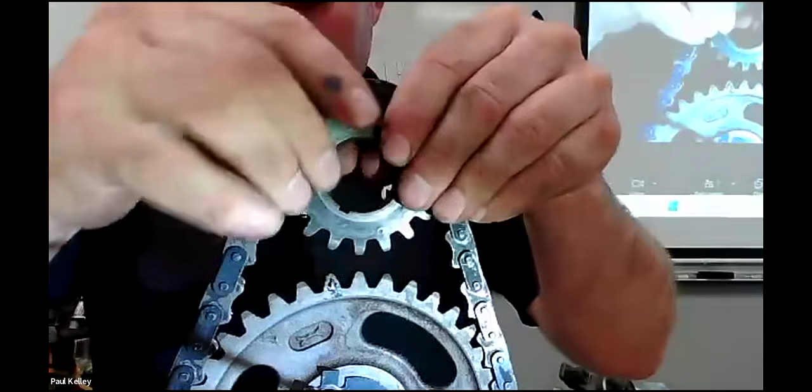Oh, that's TDC compression. The other one was TDC exhaust. And that gets people pretty messed up. You'd be actually kind of surprised.

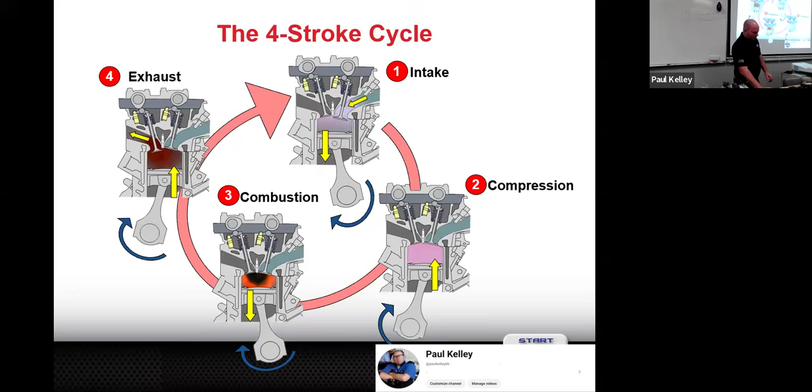We don't normally smoke test an engine, but if you were to try to do a various number of different tests that require top dead center, yeah, you're definitely going to want to make sure you're truly at top dead center.

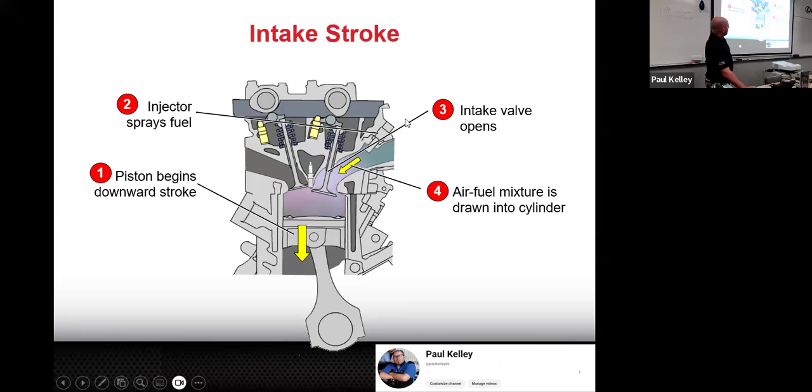All right, so on that intake stroke, piston down, intake valve opens, air comes in, all right? Compression, what should the status of the valves be?

Closed, makes sense? Now, if we were to do it down and dirty, if you're looking at those marks and you couldn't exactly tell, you can also look under the valve cover and see if the point of the cam is up away from the valve, then that valve's closed. Then if you rotate it down and the point of the cam pushes the valve down, then you know that valve's open, right? So if it's at TDC and I want to know if it's at TDC compression or TDC exhaust, I'll look at the exhaust cam. If it's like this and the valve's down at the bottom, we're good. But if I see it down here and the cam is pushing on the valve, it's like, no, I got to go another 360 and then it'll be up here. Because remember, 360 on the crank turns 180 on the cam.

Roxanne, go ahead. Exactly, but that's coming up.

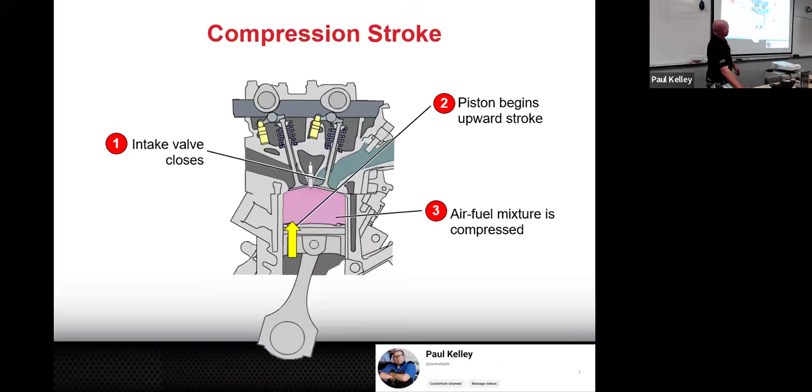All right, so if you look at this, there's your compression, and here's that measurement of the stroke, right? TDC to BDC is going to be your stroke. And then right here's the calculation of the displacement.

Like we jumped the gun a little, that was me getting excited. But in reality, you're going to look at the bore of 3.550 and a stroke of 4.160. And you're going to do displacement equals bore squared times pi over four times stroke. That part's a little bit weird, I didn't think that was the calculation, but that's the engineer's calculation. Would we calculate it? Probably not. If you like to do those types of things, that's going to be more engineering.

The customer's never going to come in and be like, hi, can I see your math on the calculations for my displacement? The customer's going to come in and say, hi, my check engine light is on, check and advise. You're never going to be like, well, let me calculate the displacement really quick. But you still do want to understand this is what the engineers would do. Cool, so that's how they get that number.

So just for fun, you guys know what a 2-liter Mountain Dew looks like, right? Yeah, all right. If it's a 2-liter engine, all your piston displacements combined equal a 2-liter.

So back in the day, people would be making fun of you. You had a 1.6, they'd be like, oh, a bottle of Mountain Dew's got more displacement than your Honda. You know, we've heard it all.

Okay, then you get into the V8s. You know what the Tundra V8 displacement is? It could be the 4.8 or the 5.7, or the 4.7 or the 5.7. And so, oh no, here we go. 6.7 would be like a Power Stroke diesel, right? So those are all the displacements - 6.7, 5.7, 4.7, that's liters.

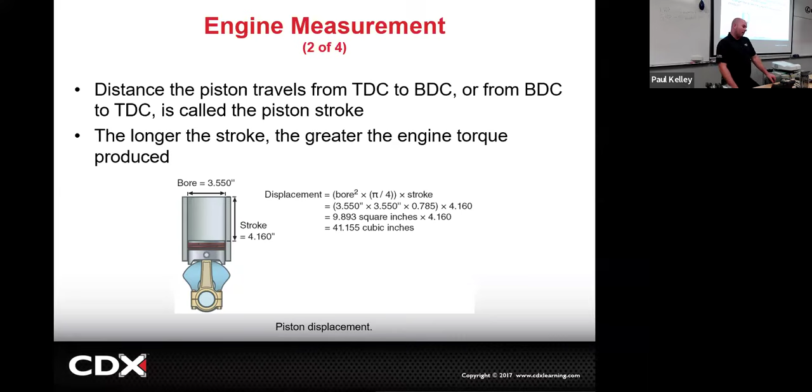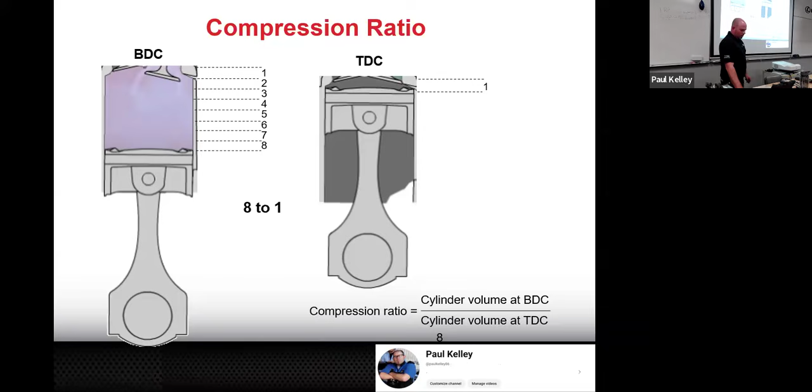So again that's kind of what it's talking about with the 8-to-1. It would be affected by the size and shape of the top of the piston. So for example, this is a flat top piston. What if you were to put a little dome on it? Hemi's a little different, but you might have like a wedge or a dome on top of the piston. That's actually going to increase it because this space up in the head was a 1, but now it's a 0.9. The space down here is reduced a little because of the wedge, but the space up here is reduced a lot. So you'd increase the compression by putting a dome.

What if you wanted to build a car to run a lot of boost? If you run big boost, you're increasing the compression, but not the compression ratio. The fact that you're pressurizing the air is going to make more pressure, but it's not affecting the compression ratio.

If you're going to run big boost, you might want to lower your compression ratio. So what kind of piston would you do? Not a dome, but like a dish piston - a concave piston. They'll call them dish pistons. That'll actually kind of drop down in the middle. That'll lower your compression. The reason you'd want that is so you can increase your boost without exceeding too much cylinder pressure, or without having such high pressure that you need to run E85 or high octane fuel.

Maybe you want to run E85 anyway, don't you? You ain't going to get no range though. From the factory, they don't want to have you forced to run E85. So they'll lower the compression a little bit. Right, cool, so they figure some of this stuff out.

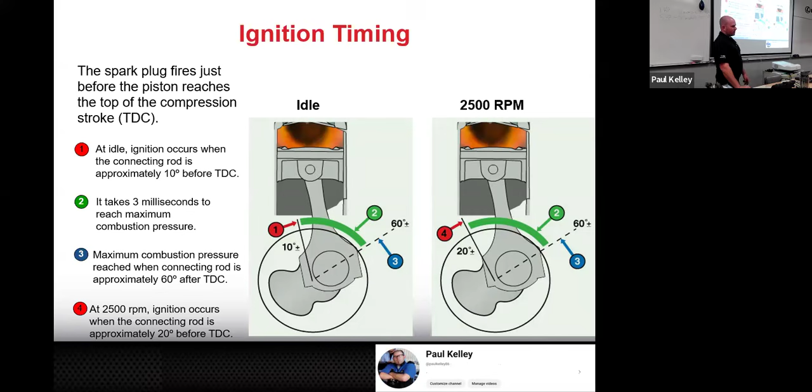And then when we talked about the rotary, I think you guys will get that when we do the discussion a little more. Now let's talk about engine layouts. Inline, everybody's good with, right? Inline front to back. Give me an example of an inline engine.

The 2JZ. You got it. 1, 2, 3, 4, 5, 6, right from the front to the rear. Inlines are always easy. V's are different.

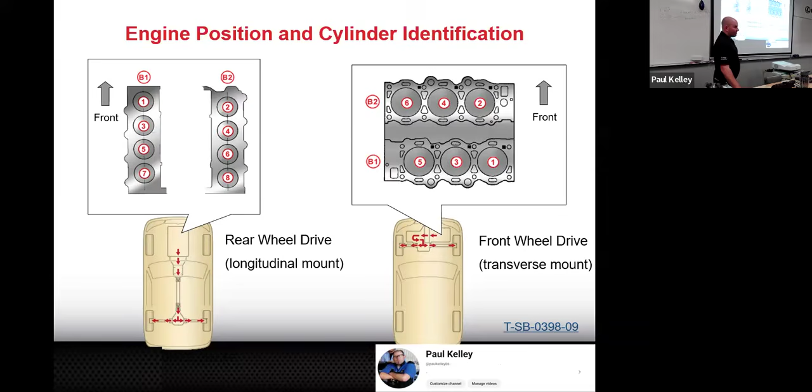All right, so let's say you're trying to figure out what the engine is. Here's a little bonus: on a lot of Toyota stuff, there's some numbers stamped in there. So if you're trying to determine what it is, you could look at the VIN or pull a VIN, but if it's not in the car, there's going to be some numbers.

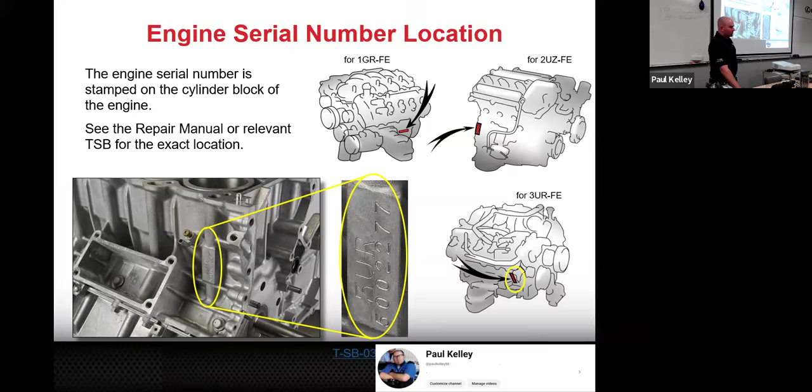Now let's break down what it means. This is a fun question I got in the past - somebody asked me, why is it a 2JZ GE, GTE - GE and GTE?

All right, well let's start with the basics. FE - almost everything you're going to see is FE, fuel injection. Electronic fuel injection - the E is the electronic, but the F is a narrow included valvetrain angle. You're like, what? Narrow included? Okay, you ready? You guys have seen this dance, ready?

Not the YMCA, no - narrow included, wide included. Narrow, wide, okay? So if the valves are like this, that's narrow, that's normal. The wide is actually really cool, but if it's wide, think of how big that head's going to be - that head's going to be huge. If you ever look at a 2JZ GTE, it's a beast. So you've got the intake, and it's kind of a flatter path, so it's easy to have the intake flow in. It stays kind of flat, does its thing in the cylinder, and comes out kind of flat.

It's good for flow, it's high performance. But in a Camry with the V6, we don't have room for a big head like that, so we're running narrow inclusion. FE is going to be the generic, more common one. GE is wide. What if it's a GTE? It's a wide inclusion turbocharged - that's the one you want, right? So now you know why.

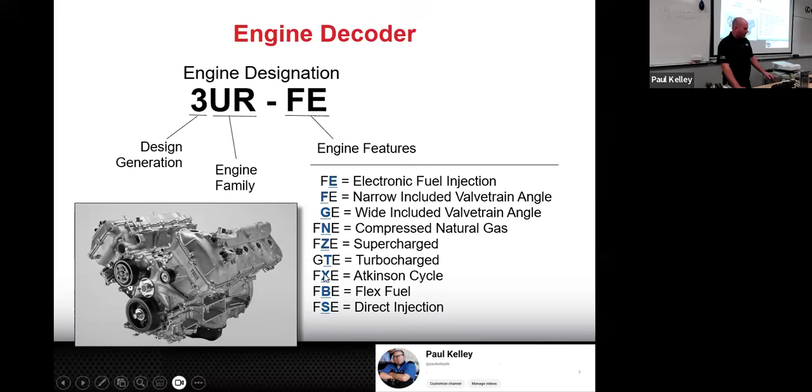T makes sense - turbocharged. X is Atkinson's, but I think K is too. Yeah, yep. So why they changed it, I don't know. They didn't really update any of this, though - they changed it but never really put out a ton of info.

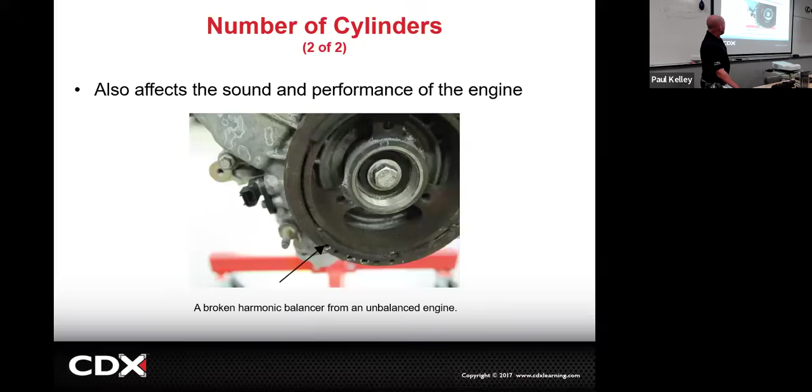And then when we talk about number of cylinders, I think you guys are probably pretty good. I think right now is actually probably a good time. You guys feel like you want to take a little break? All right, so let me pause here - I should have told you to bring your...